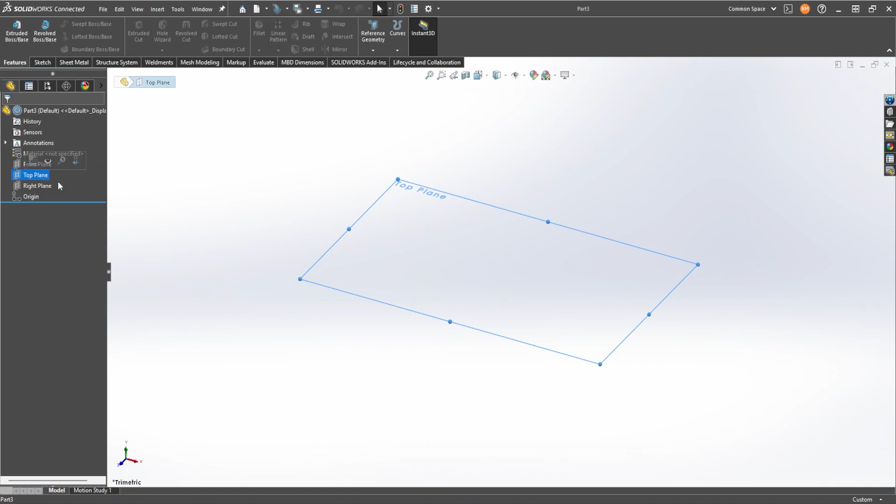We'll start off in Solidworks, new part. Starting on the top plane, we're going to begin with the first cap, using a radius of 70 millimeters.

After that we'll extrude it to 15 millimeters, and that will serve as our end cap.

Now we're going to go to the front plane and draw out the shape of the lamp itself. We'll just start with a simple line sketch and then get it dimensioned.

Right now I'm doing the outline. I'd say we'll do the thickness around 2 millimeters, and then we'll use the revolve feature to create the shape.

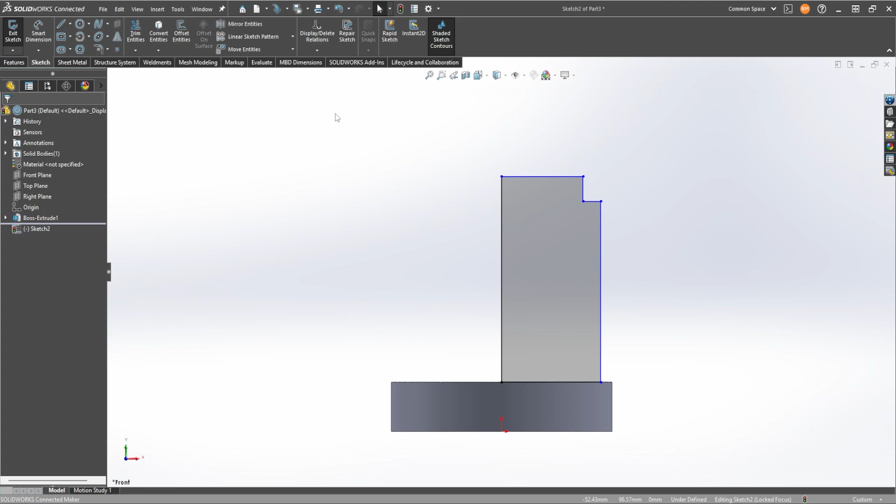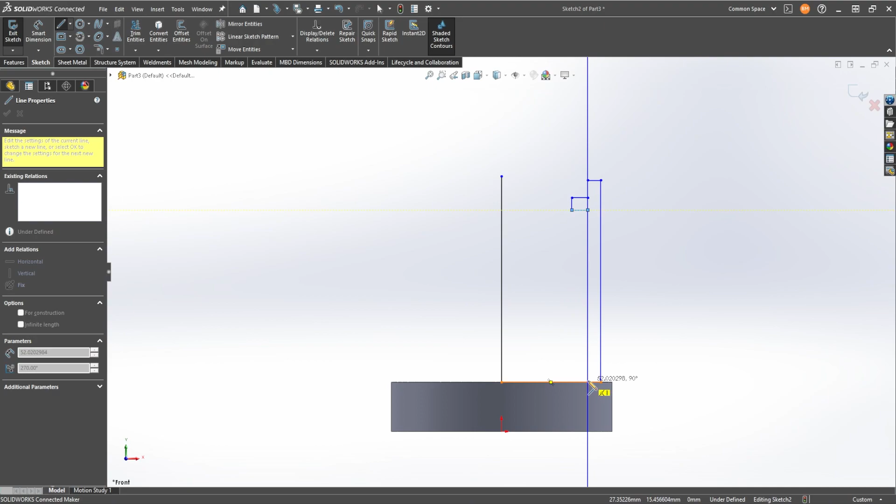So we'll have that thickness and make it 2 millimeters. Just trying to delete that line and create a new construction for the revolve.

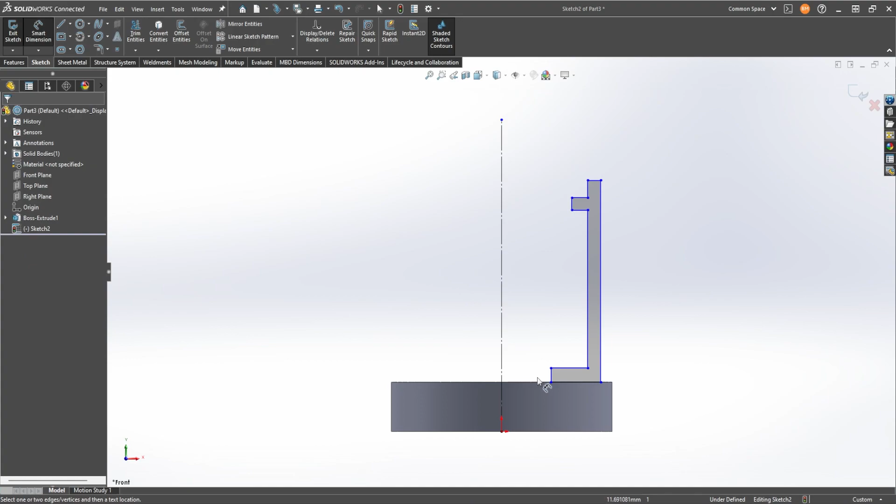2 millimeters is pretty good for see-through clear plastic textures, so we'll stay with that. Get all the edges, fully define the sketch, and we'll do a revolve feature.

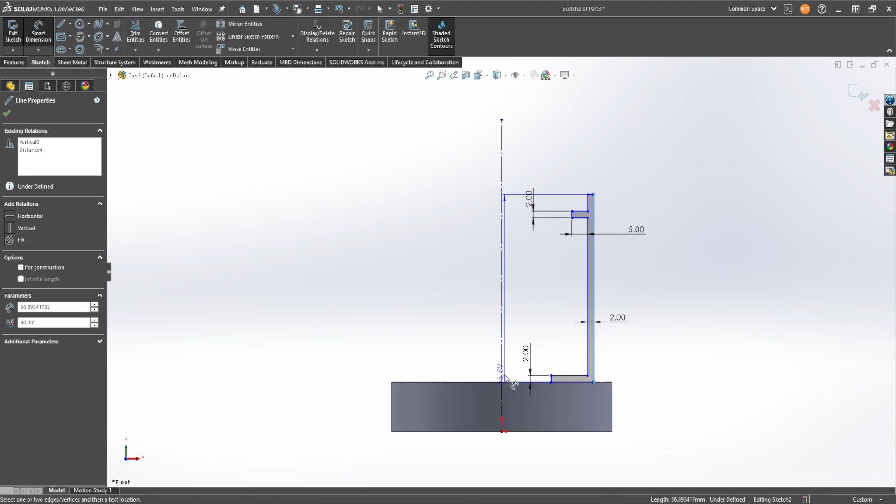30 millimeters away from the center. I'm just adding another lip here to make it look better. I'm going to trim it out, and then dimension it as well so it doesn't change if we change any other parameters of the sketch.

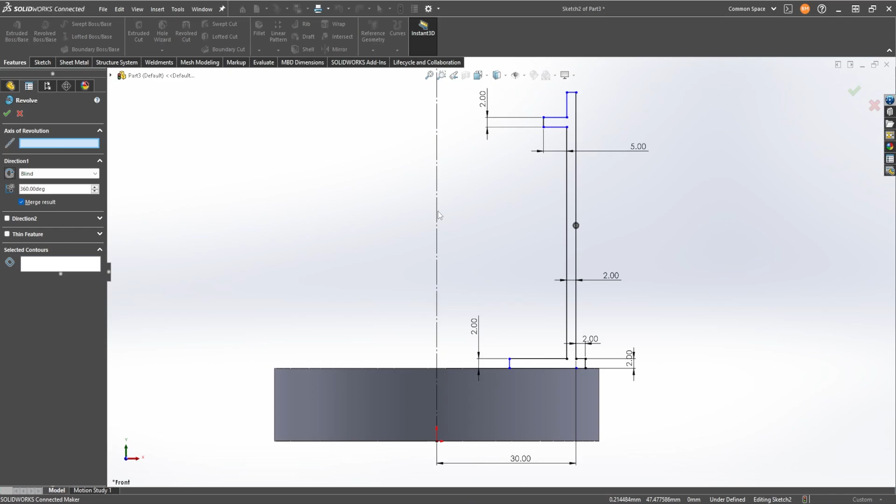Let's give it a revolve. And there we go. Just make sure it doesn't merge with the rest; we want this as a separate material for this part. Yay, got the basic cup.

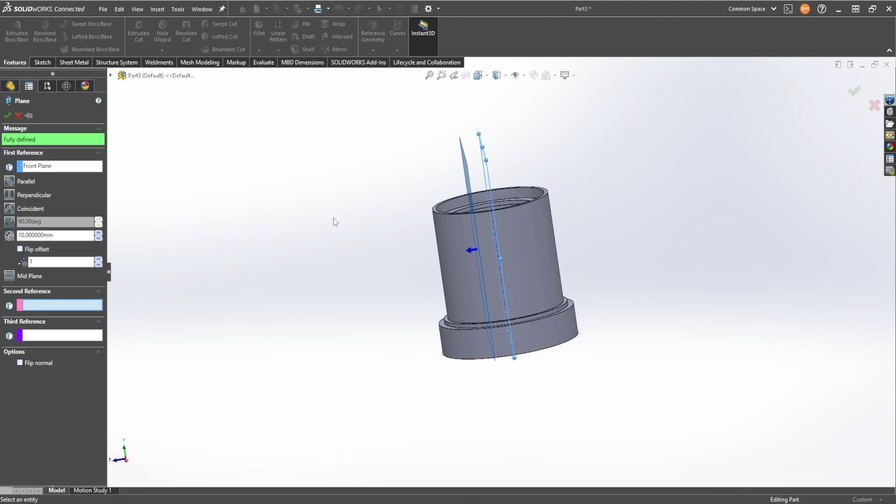Now we'll add the texture onto the cup itself. I'm going to use the wrap feature to wrap around a few ridges.

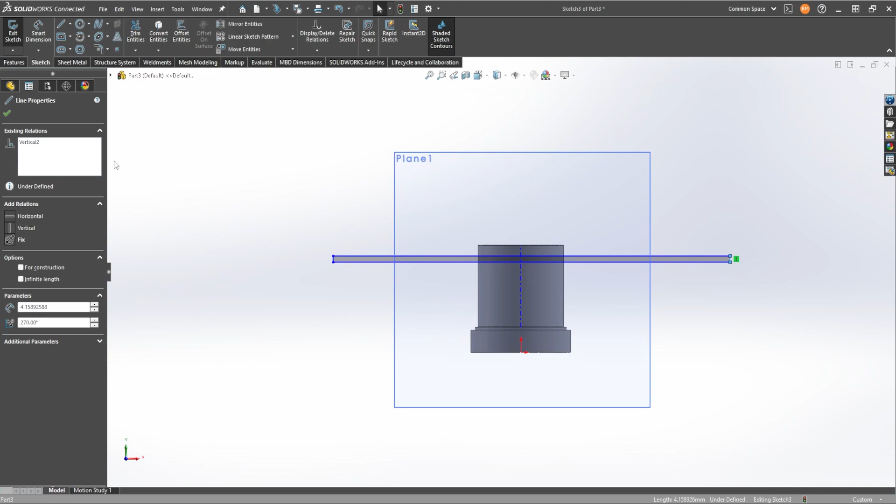I'll just draw a couple simple rectangles. We'll get them to, I believe, 2 or 1 millimeter. We'll do it 2.

And then from the top, we'll get 4, or 2 as well, or maybe 3.

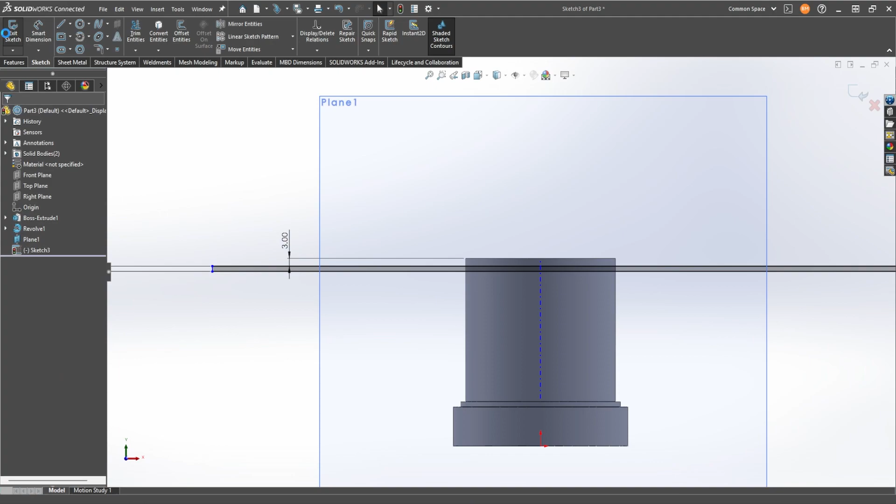I'm just correcting up here. I noticed the cap extends a little bit as well for the next one—it's modular, so you can have multiple lights. So I'm adding a support, making them the same length as the bottom.

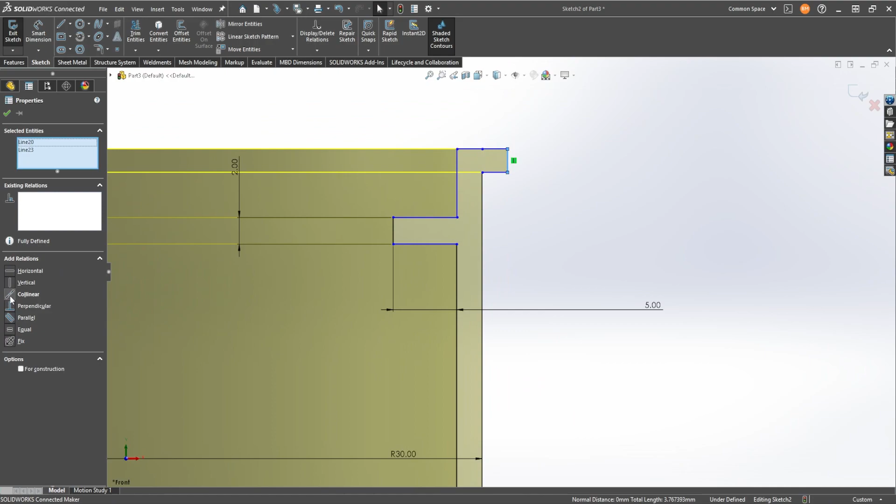Now I'm going to double save this project. This is part of a bigger project which I plan to follow up in later videos; I'll be needing this tower light later.

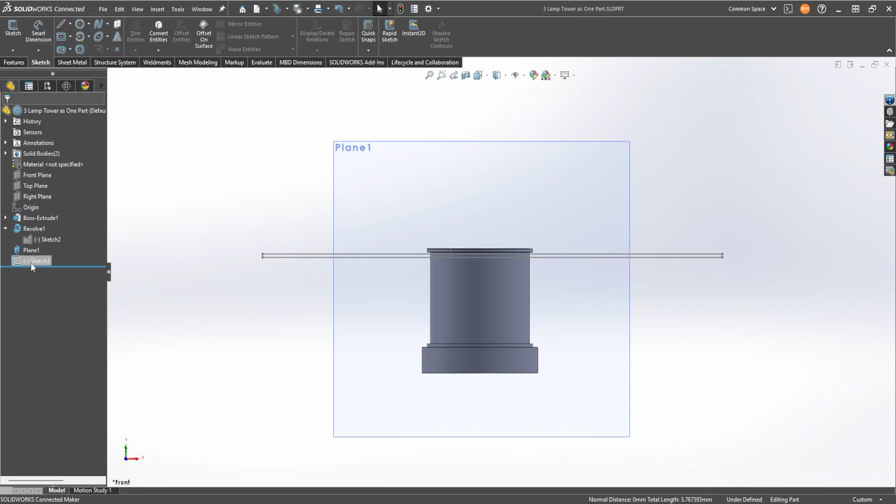So I'll take the array feature and then bring it down.

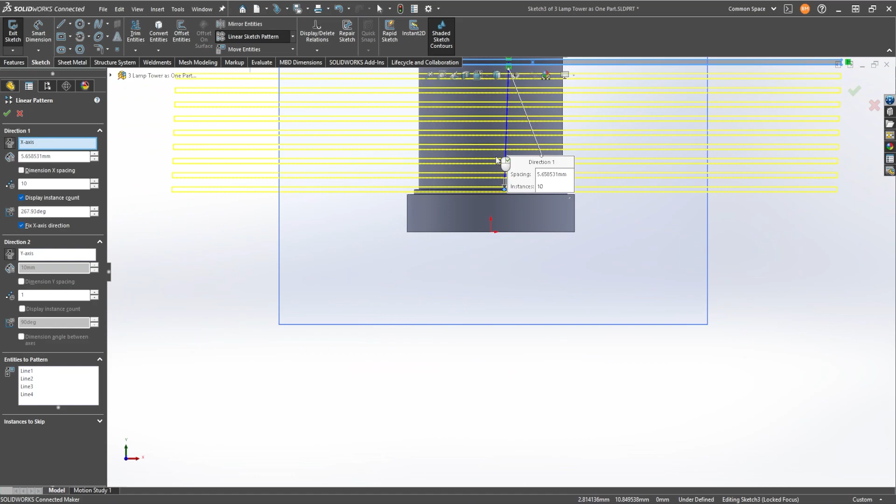Once we complete the sketch, we will wrap it around and then cut into it. Extruded cut, and that should give a pretty nice feature.

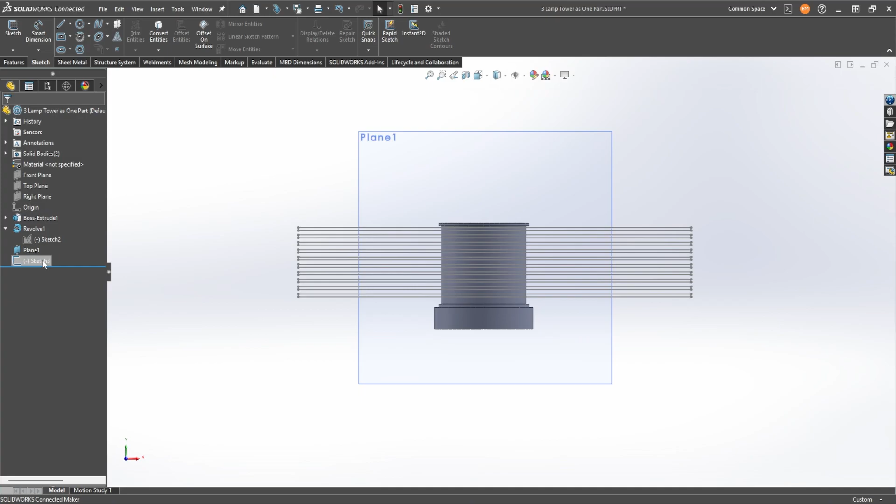It's all about the details at the end. The more details you have in your product, the more realistic it looks, and the better it is for your portfolio. So we exit the sketch, go into features, and wrap it around.

Select the surface we want to wrap. I'm not sure what I'm doing wrong—usually when I wrap, it only does half of the object, but I found an easy way to fix it: I just go back to the same sketch and wrap it around again.

I'm just fixing it up to 1mm; the ridges were a bit too big. So just double checking, we might adjust it slightly.

I might add more ridges. I was double checking with the reference picture, and it definitely has more ridges.

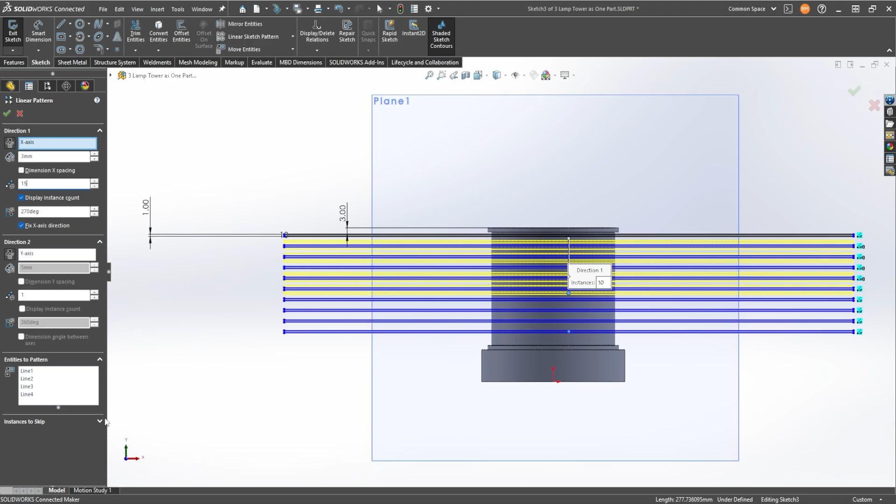As you can see, you can easily adjust the feature, the array, by right-clicking on the properties. And here I'm back wrapping again, and that should get the whole product wrapped.

So for that we'll do the middle—there's a little section where the lamps are stuck to a little plastic square, I think, or metal square, and that's where the cables and wires run.

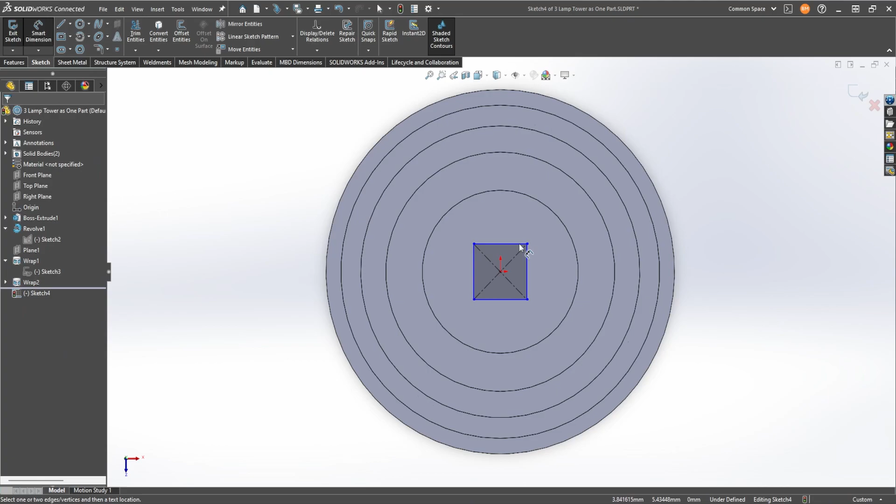So we'll extrude it to 30mm, make sure it's not merged—we want this as a separate part as well.

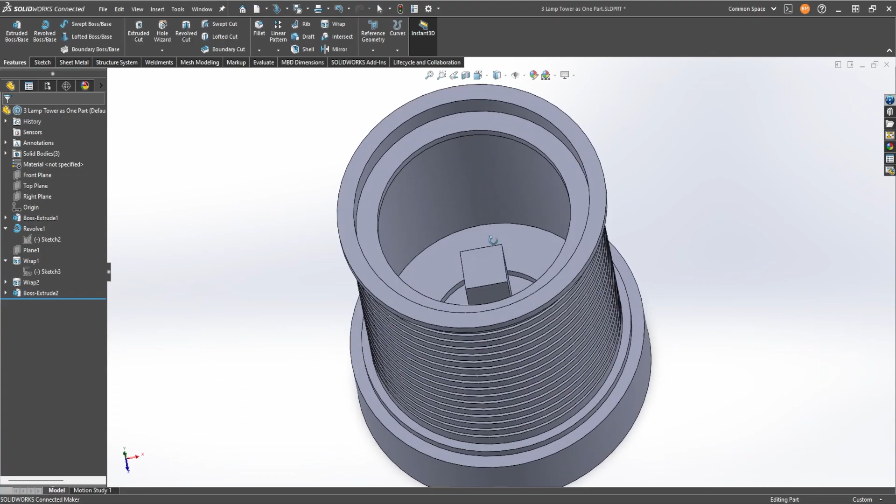Yeah, I'd say that looks pretty good. I'm just going to hide the outer shape, and now I'm going to draw a singular light bulb, drawing a center line so I know I'm on the center.

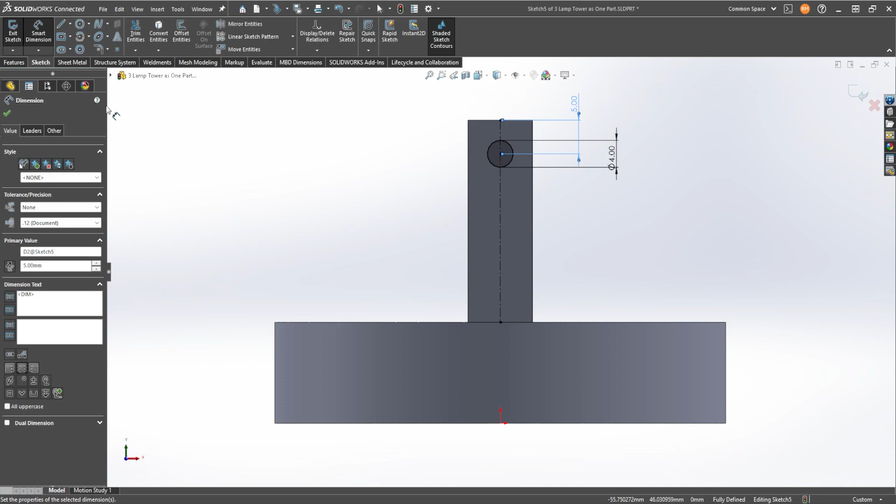We'll start off with a circle, around 4mm will be good, and then from the top let's do 5. Features, extrude—we'll do a couple millimeters, and then we'll dome it so it looks more like a light bulb.

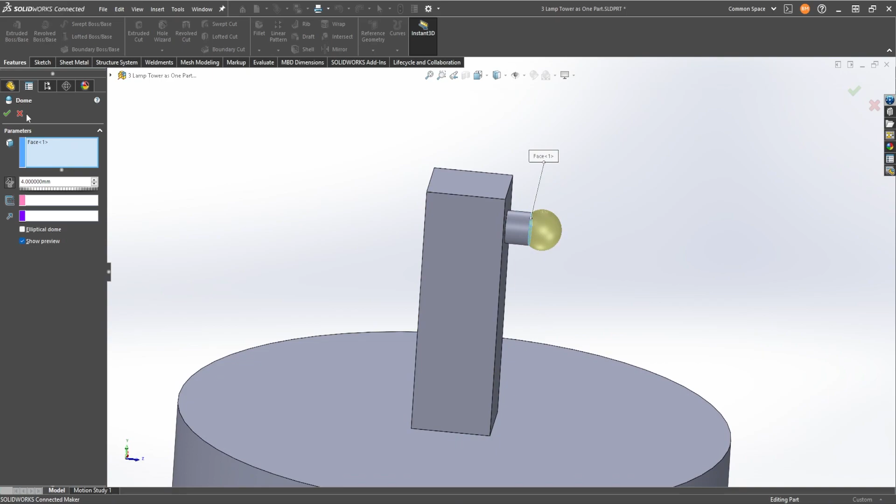I wasn't bothered looking for the dome feature, so I just pressed S on my keyboard, which opens up a little search bar beside your mouse. That's pretty useful.

We're going to use the circular pattern to get the light bulb on the other corners, and that should easily work nicely.

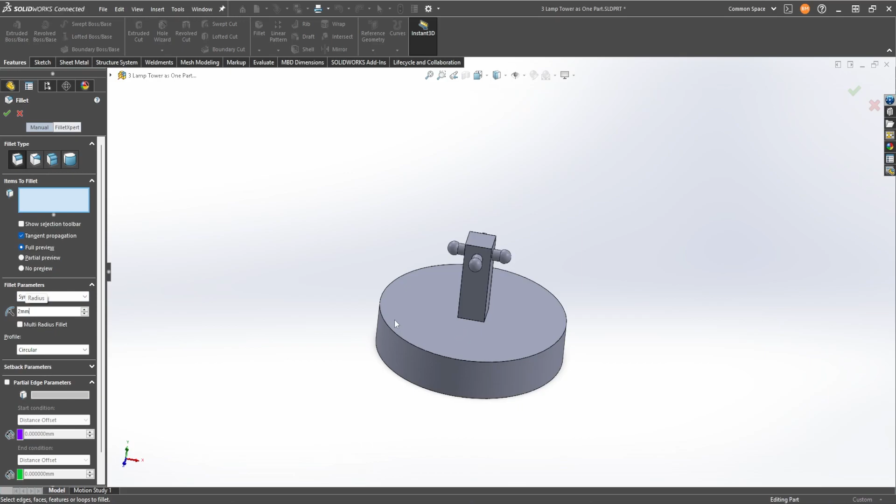Let's fillet it up a bit so it looks cleaner. I think I should have left out the bottom fillet, but we'll leave it for now—add some more fillets around.

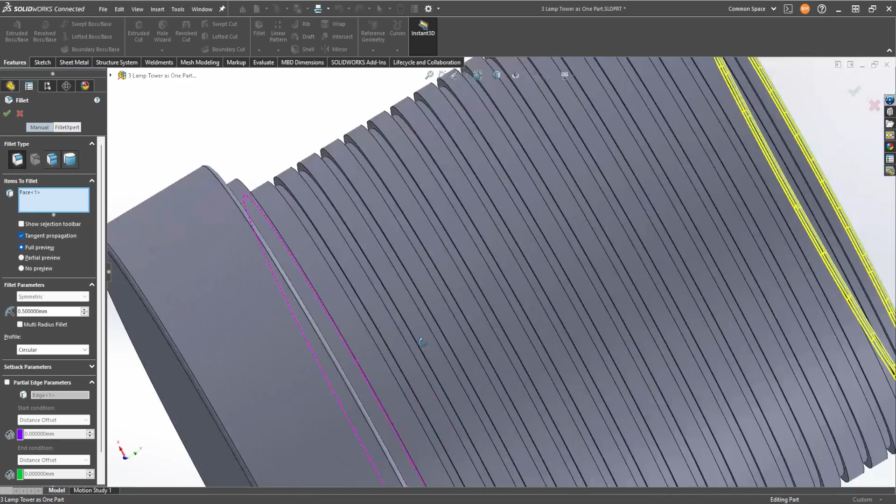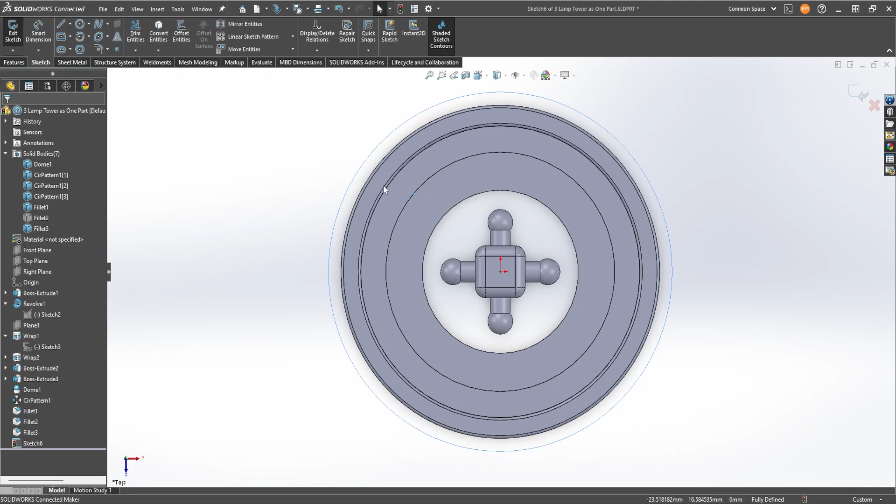You could go around and add fillets to every single edge, but I'd say it's more realistic if you leave out some edges, especially if there's contact. So if there's one surface contacting another surface, don't have a fillet on that - make sure it's nice and flat. But when you have a corner that's sticking out, that could be filleted. That's how usually everyday items work. You don't stick two items with glue where one has a fillet on it - you don't get as much surface area.

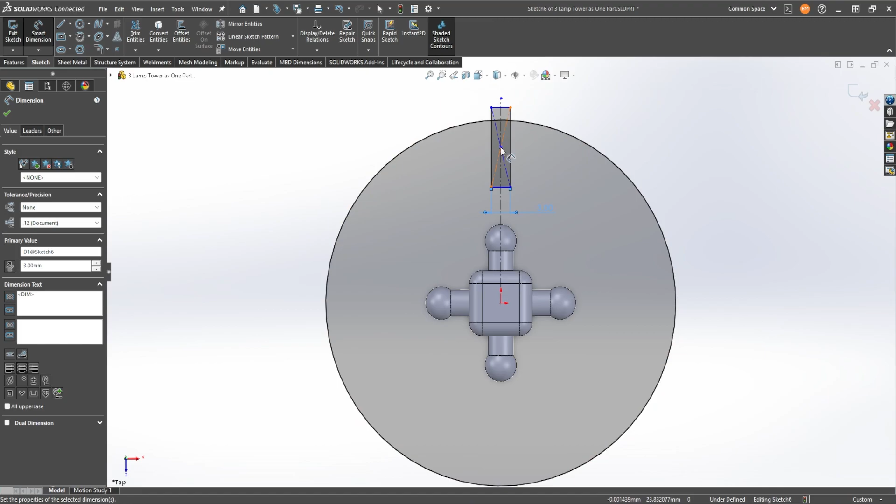So now I'll be just drawing a little support. I saw the reference picture has a nice support sticking out. The more details you add, the better your product will look at the end. So I'm just adding a small support here, negotiating what's the best length. And I'm just going to trim out the edges.

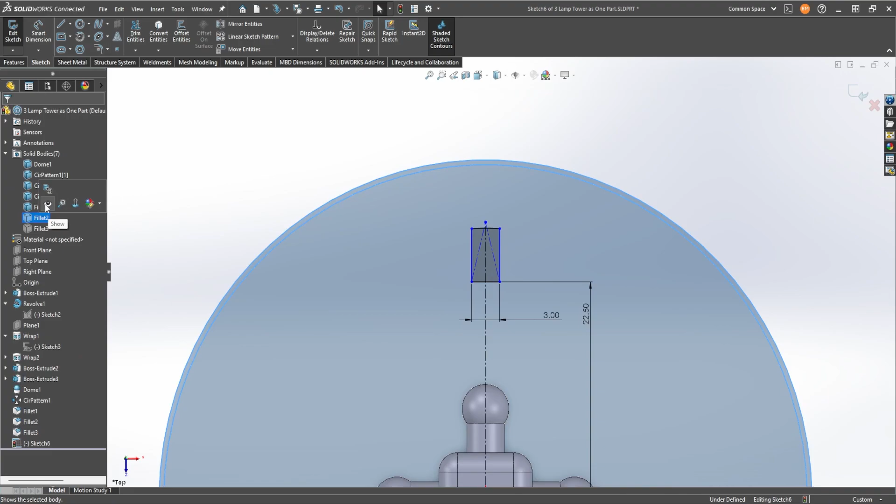Make everything else visible. I later discovered that you can make items or bodies appear and disappear by pressing tab and shift tab and roughly pointing with your mouse to the area where they should be. So it's gone off the center.

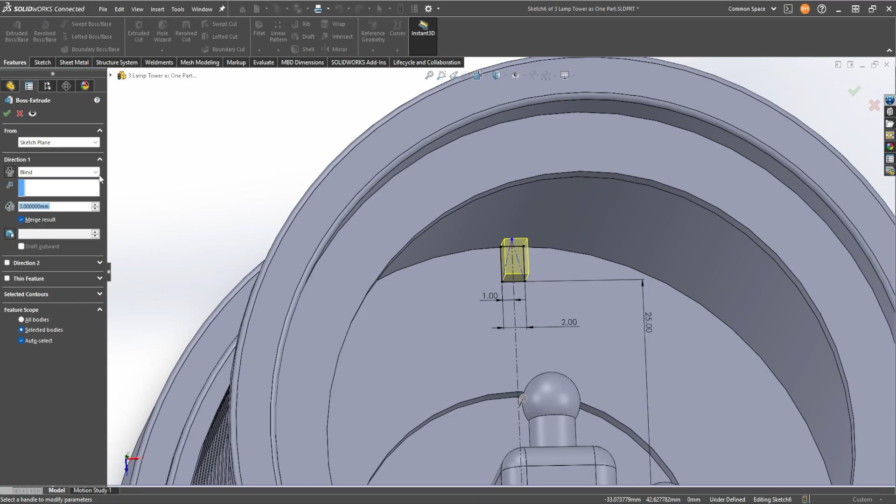I'm just going to do 2mm divided by 2, because 2 is the thickness and 2 is to get half. I'll get that extruded to the top surface. I'll just stick it here - it's going to be merged anyways.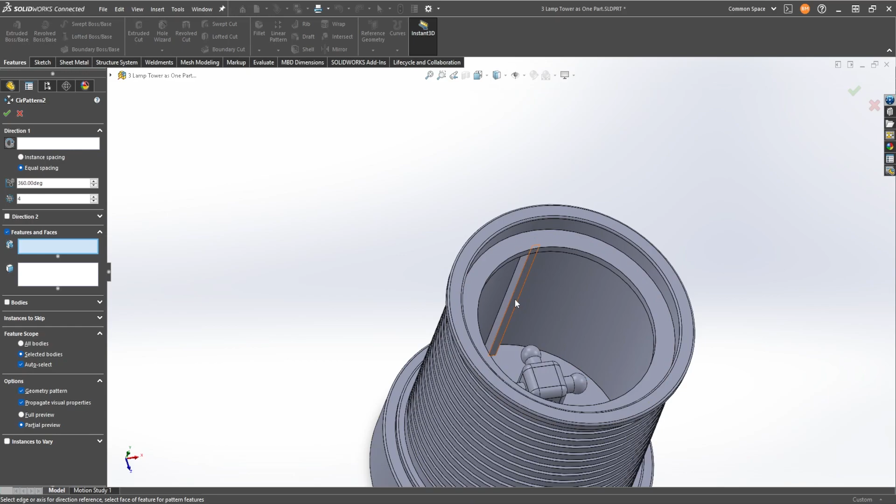So time for the circular pattern, and I'd say we'll do 4 of these. Yes, that looks about right. No, we'll have to do the edge itself - we couldn't do the surface. Yes, I'm pretty happy with the result.

So there we go, we have the cup and the inner mechanism done. So time for the top - we'll do an end cap. But first I'll do the bottom cap, or the bottom leg.

So I'm just checking the height - we have roughly around 5mm. So on the bottom cap, I'll do around 5mm as well.

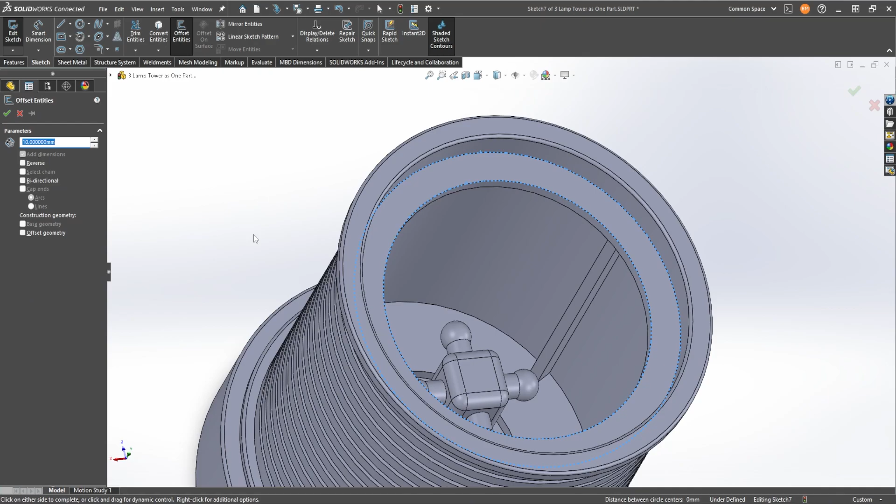I'm trying to offset, using the mouse gestures. So if you want to do mouse gestures, you just press and hold right click, and then flick your mouse up, down, left, right, and it'll give you different features. You can adjust that in Solidworks settings underneath mouse gestures somewhere. If you do a Google search, you'll be able to find it.

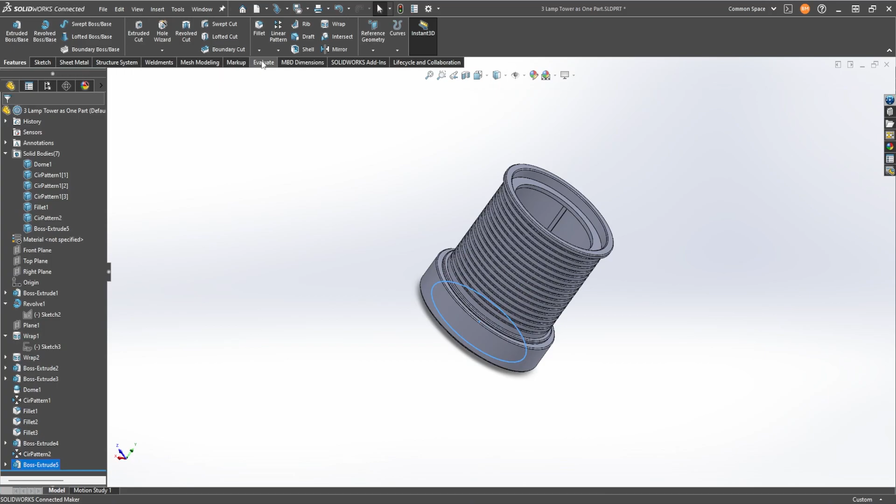So I'm just here double checking, around 5mm. Looks about right.

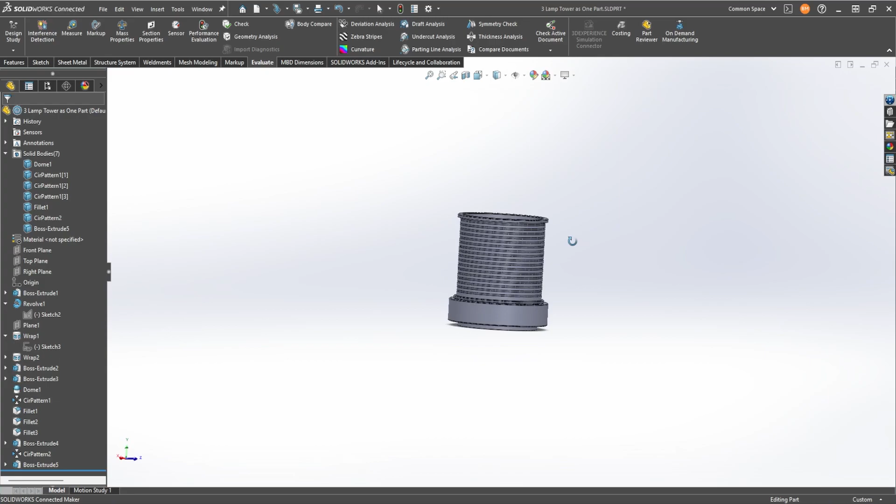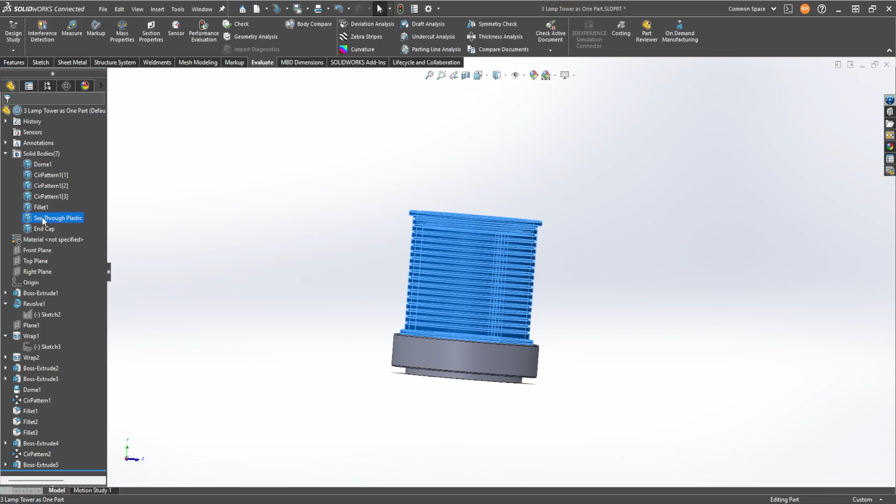I'm just going to rename the bodies now, so later when we're texturing it and saving as an assembly, it's going to be easier. Also, make sure when you're doing assemblies or drawing everything as one part but multiple bodies, please just don't be repeating yourself. Like here I could go out and draw another cup, draw another cup, draw another cup - I need like 3 or 4 of these cups for lights. But I'm not going to redraw them. I will later just copy and paste them again in the assembly.

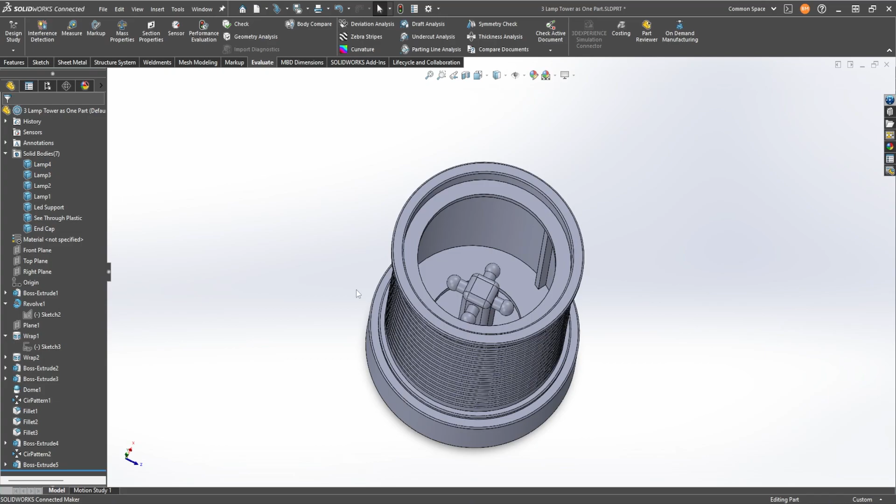So now time for the leg. We'll do it on the right plane. Start off with a center line - it's going to be a revolve feature as well.

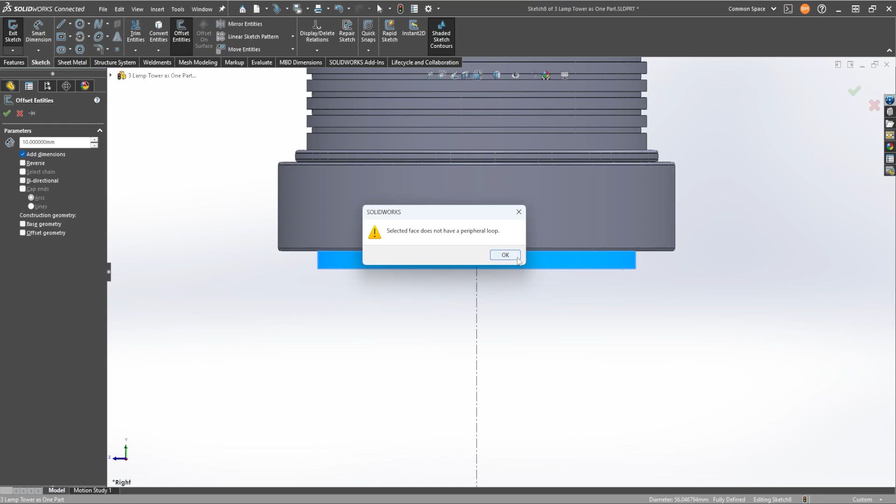I was trying to convert entities of the circular edge, but for some reason I have disabled the line highlight. That's something I'm going to have to figure out later. But for now I'll just draw around.

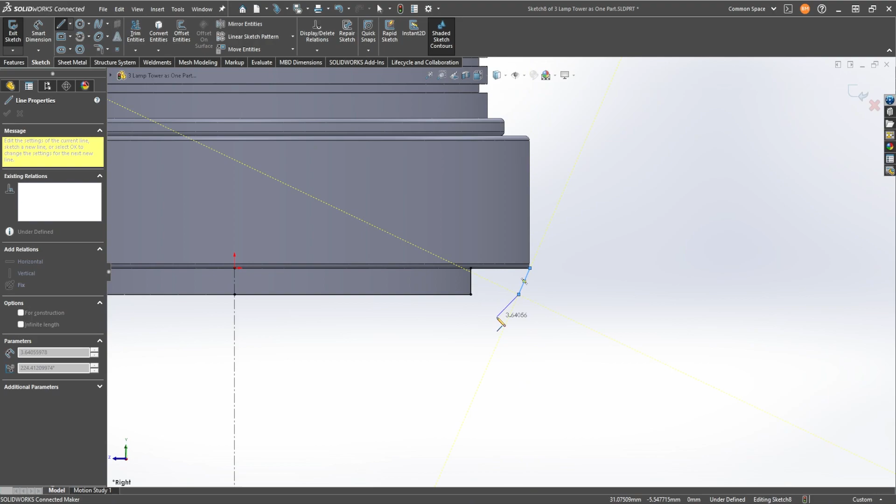And then I notice it sort of comes in and then goes down at an angle across, leaving space for electronics, and then down here for the leg. I'm going to later fix it with dimensions.

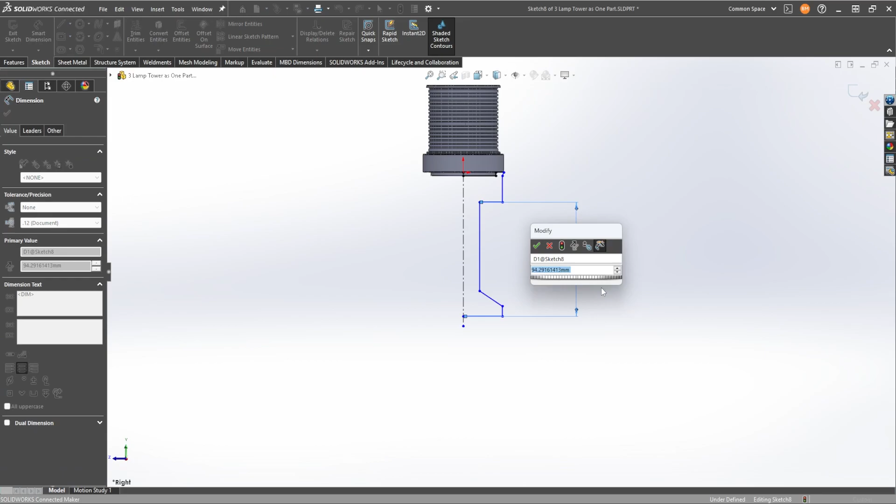So doing the base now. Set the height to 60mm. Obviously everything got shifted - we'll bring it back up again.

Like that, there was a mouse gesture as well - it's much quicker, much faster. Overall this drawing took me 45 minutes. It was quite short, nice project.

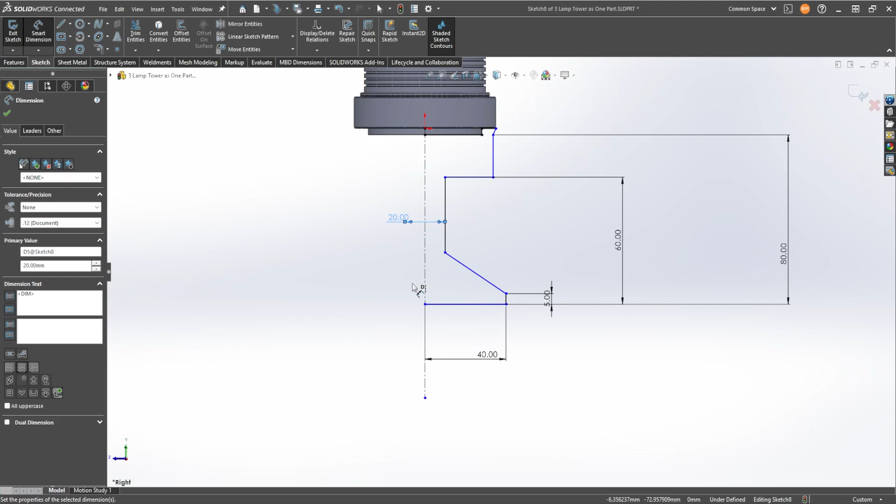5mm for the base, and then we'll do the angle as well. So first I want to get the radius for the upper part of the leg, or the middle part I should say. We'll fix up this edge here as well.

It's just the little details like the little chamfers and the fillets that really make your drawings pop out.

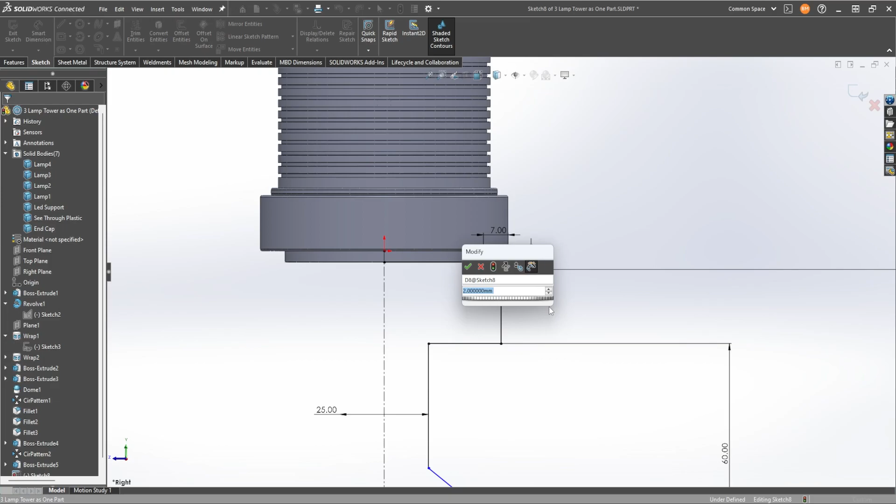We'll get that across, and then we'll get the middle, the upper part as well. I deleted the other one so I could have the dimension there. Time up for some 5mm fillets.

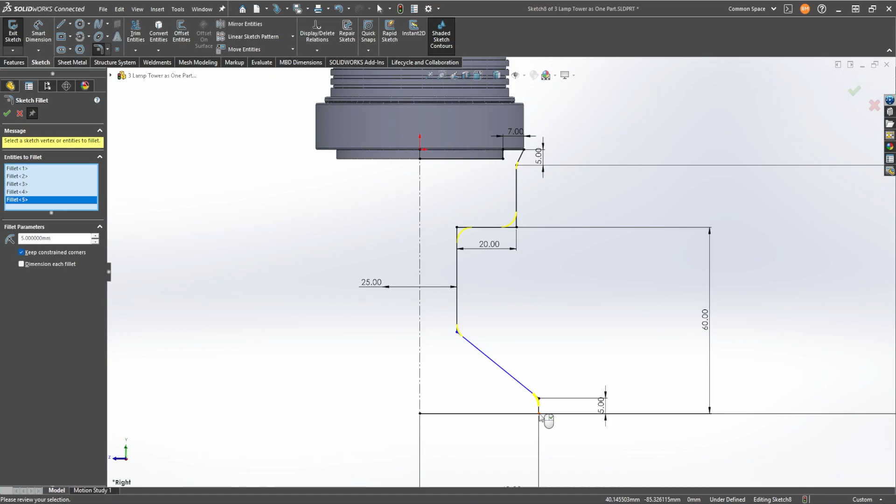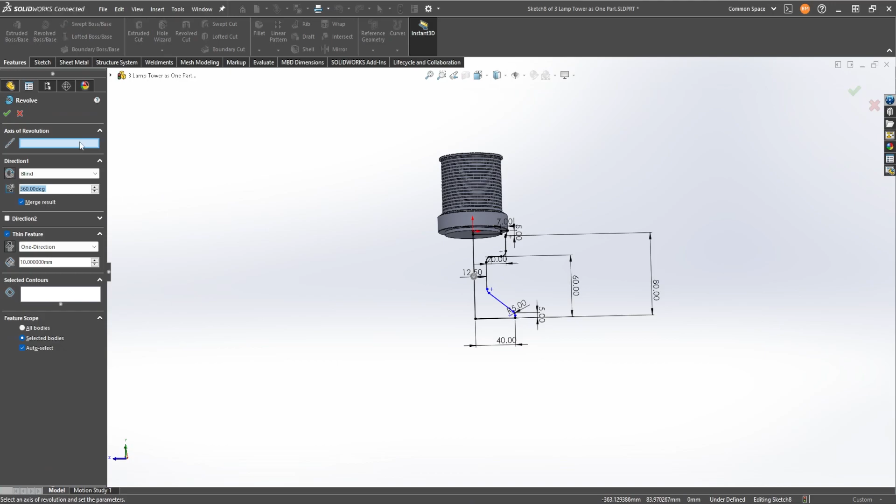And then we'll revolve the sketch. I had thin feature selected, but I didn't notice it, so I was trying to do the sketch again and again. Sometimes you just get funny situations like this in different programs. Eventually we'll figure out what's going on.

I decided to just leave in the struggle, so you see that nothing's perfect. You always see these videos on the internet where everything works so perfectly fine, Solidworks never crashes, never has issues.

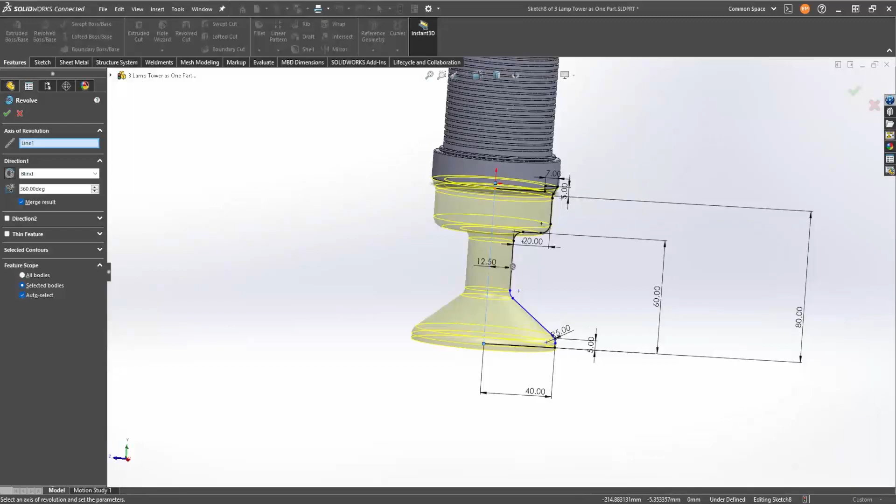Then I realized it has a thin feature, so I removed it, and it worked perfectly. Probably the previous rotation feature I used had a thin feature, so that got saved from before. Here I'm just going to fix up the legs a little bit, make it look a bit better.

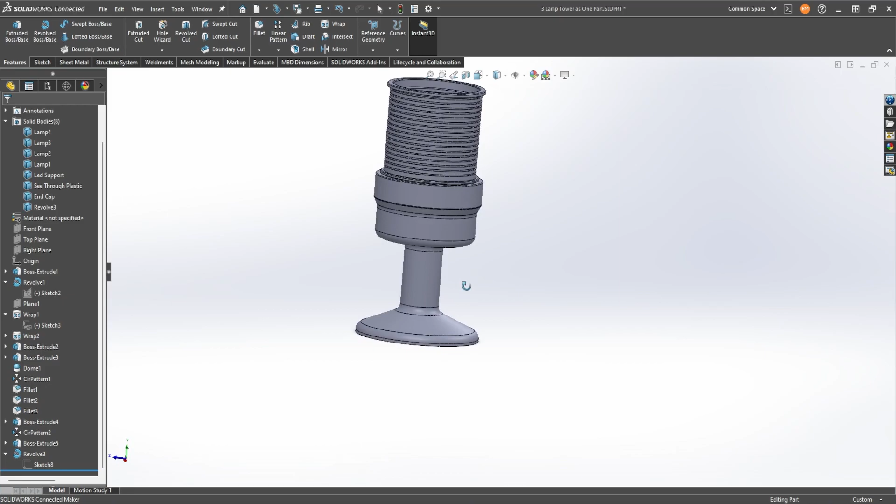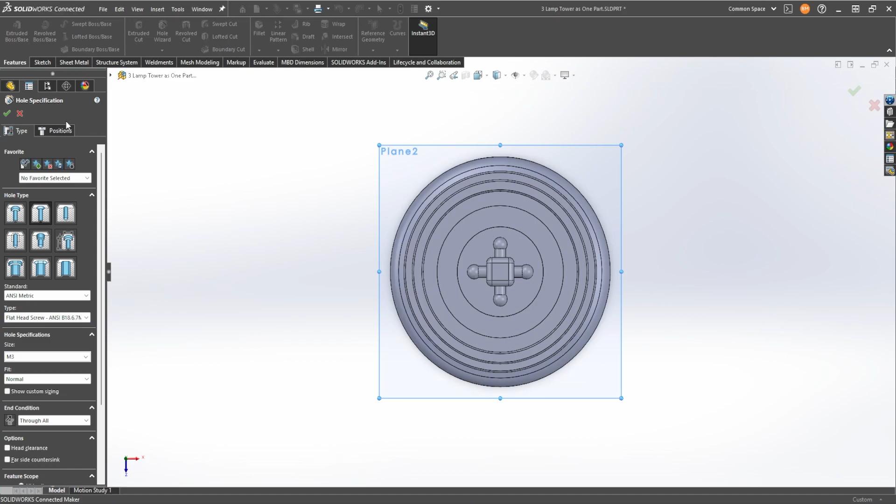Now we're going to prepare the plane for the hole. I'm just choosing the correct size. I think the image said M3 as well, so I put an M3. Then we move it out here.

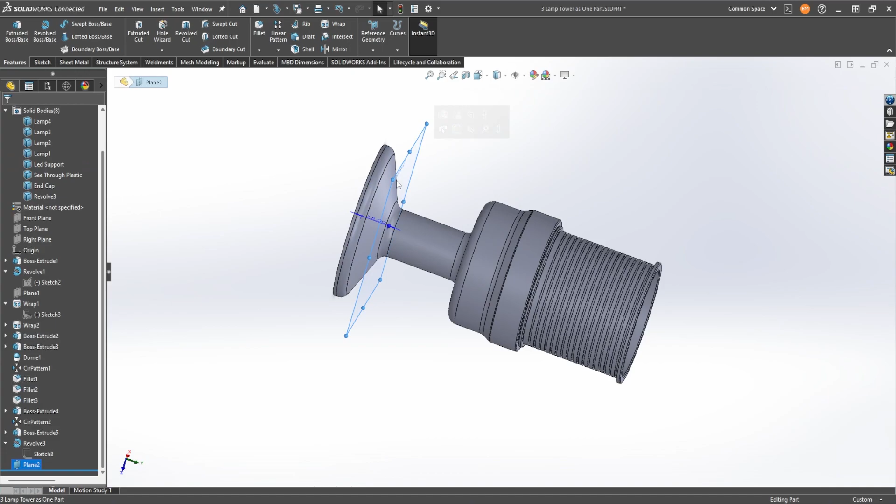Unfortunately, for some reason, even though the normal of the plane itself was correct, the hole feature still wanted to draw holes in the wrong direction. So I'll be battling this for a couple of minutes. Now I'm just hiding away all the parts that could have been interfering.

That was with Tab here. So the previous one I right-clicked to hide, and the other ones I tabbed. So I'm going to try the feature again.

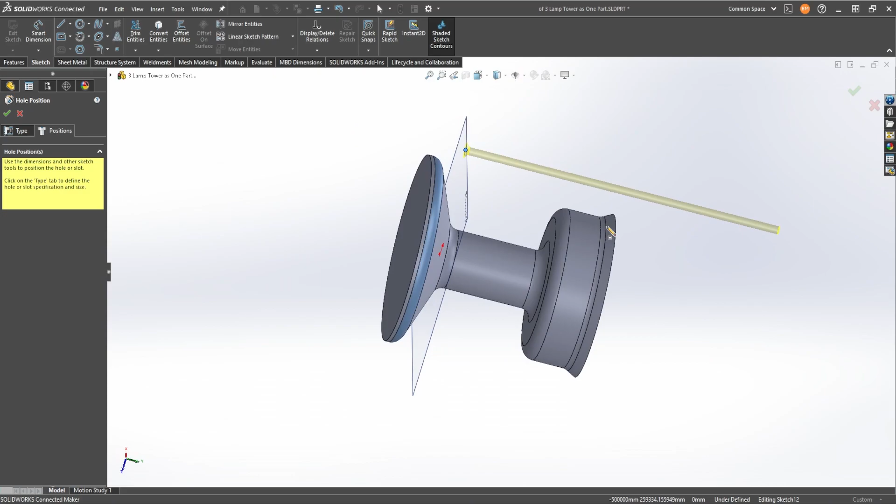Now we'll have a look at it. It's still going the wrong way. I'll probably do another plane and try to aim it towards the plane. I'm not sure why it's going the wrong direction. It's probably something that if I looked around more, I'd figure out eventually.

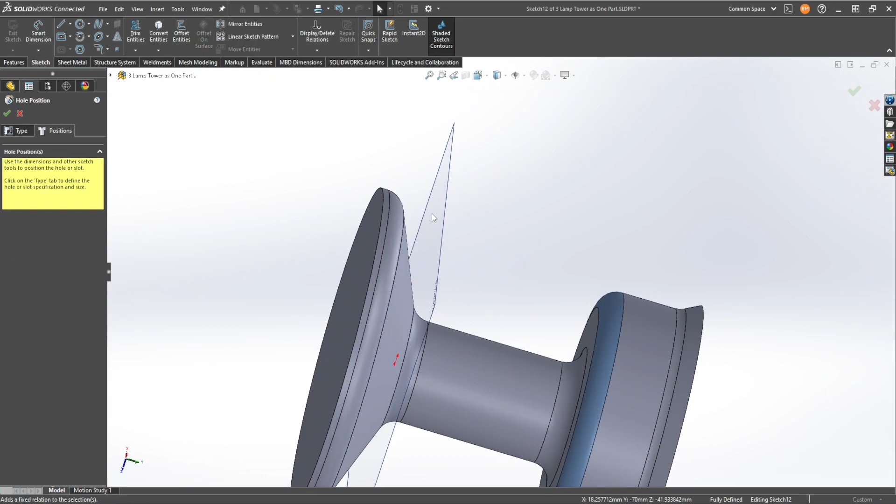So I decided to go for the surface. But that means I won't have the nice countersink, so that's something, like I said before, I'll do with another surface.

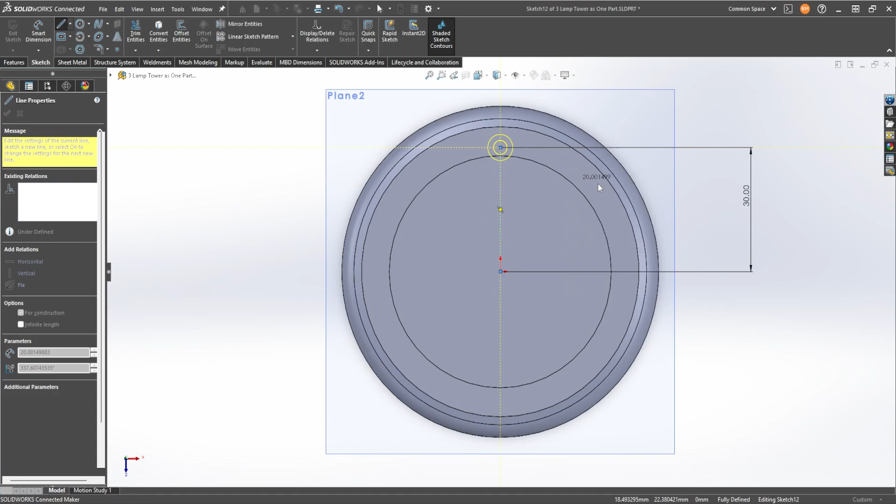Just want to double check that it's on the center line. There we go, we have an M3 hole for the screw. There's just some thunderstorm in the background.

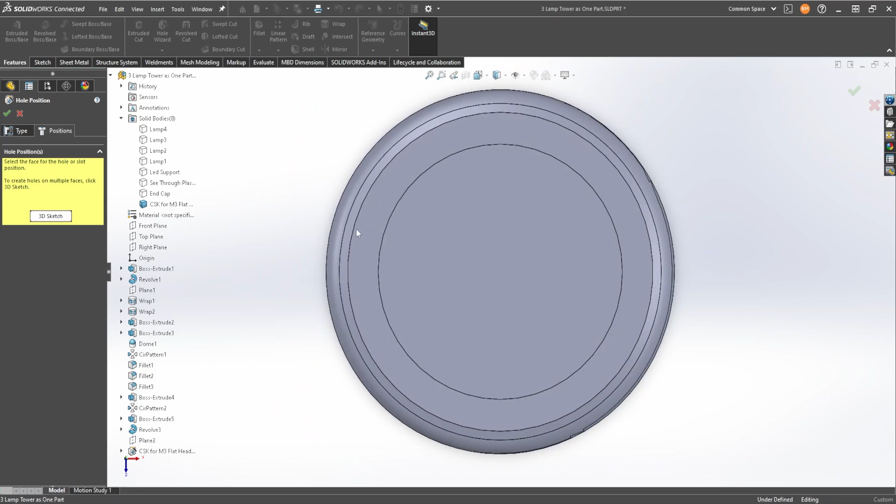Now I'm going to try and make a slot so the screw sits nicely in the hole. So that's me trying to line the hole, doing it from the far side. As you can see, I'll be having a similar issue again.

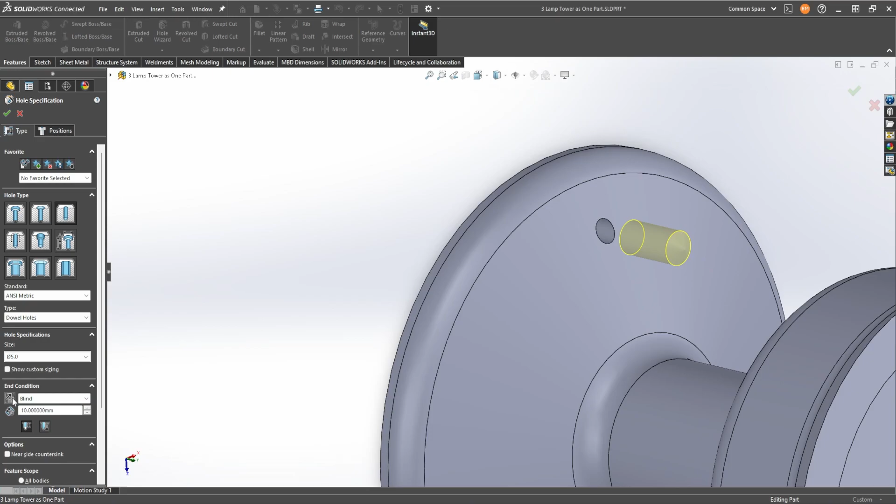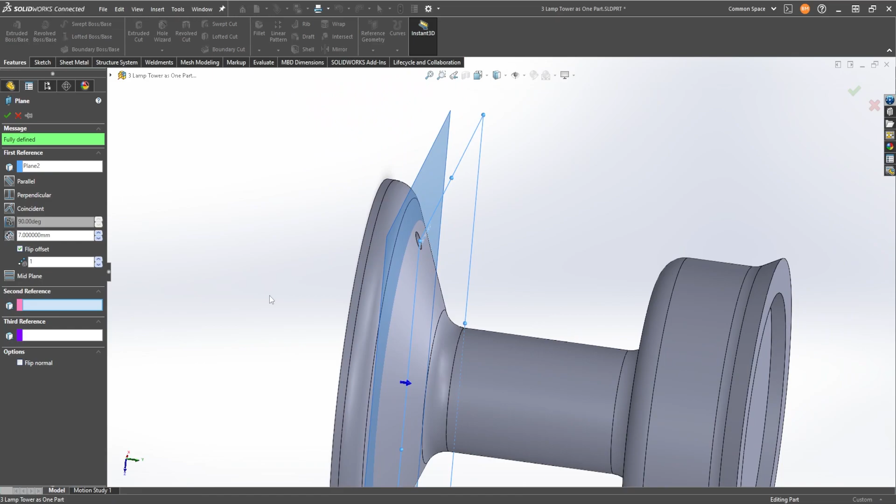So I'll just create another plane and then probably feature it into the surface plane. Take the current plane and give it a couple of millimeters. A little bit more, yeah, that seems about okay.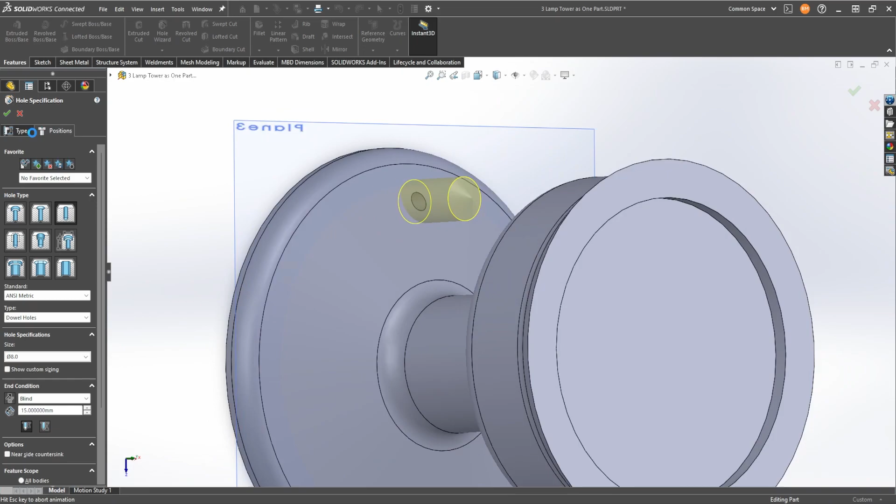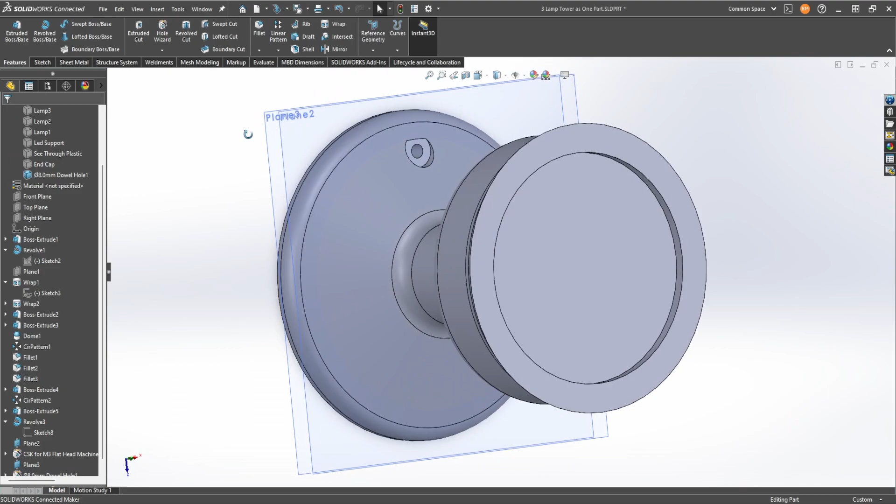Select the center and then down to the surface. I think I started to sketch on the wrong plane in the first place. I'll select the first plane and get it correct again. Just these little things you have to get right with Solidworks, or maybe actually any software.

Pretty nice groove, so I'm just going to lower it down a small bit, and then we'll use the circular pattern feature to get it correct, and there we go. We have 4 holes to secure our lamp.

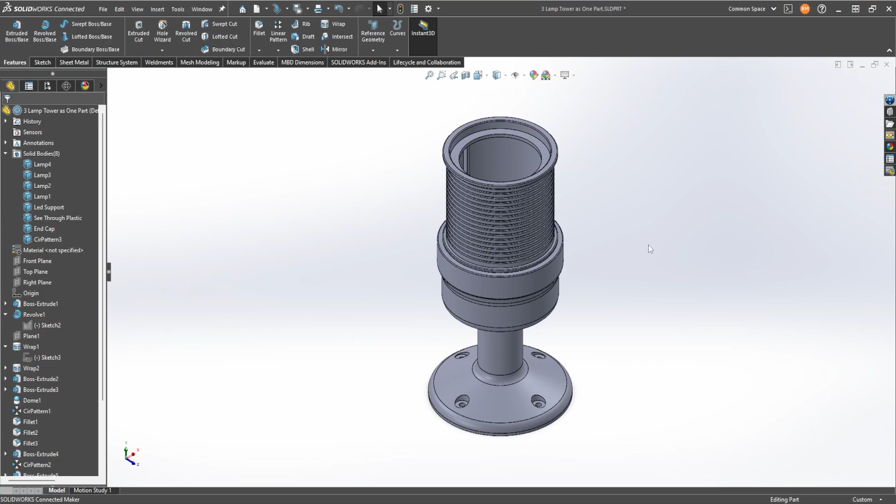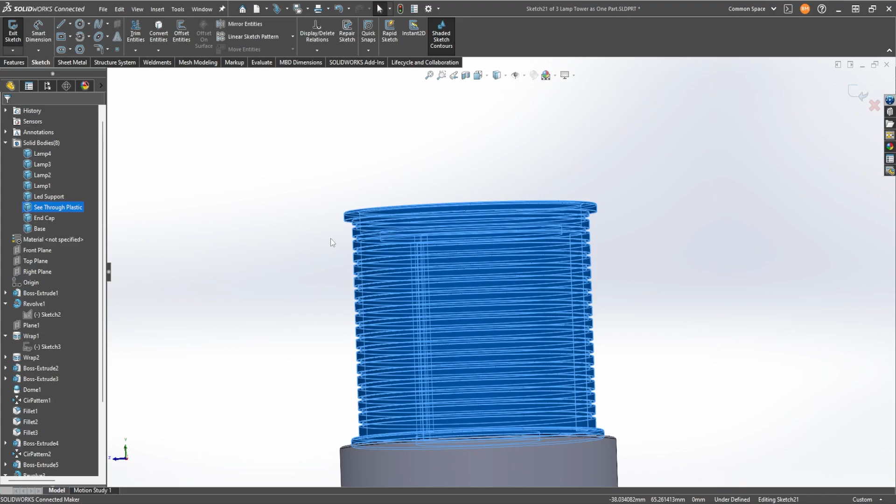We can show all the parts with Shift Tab, and we'll resume this in assembly. There it is, projected transparent, you can see it looks pretty good. So I'm going to add a top cap, and then I'll move it into assembly. I'll just split up this video and enjoy the rest.

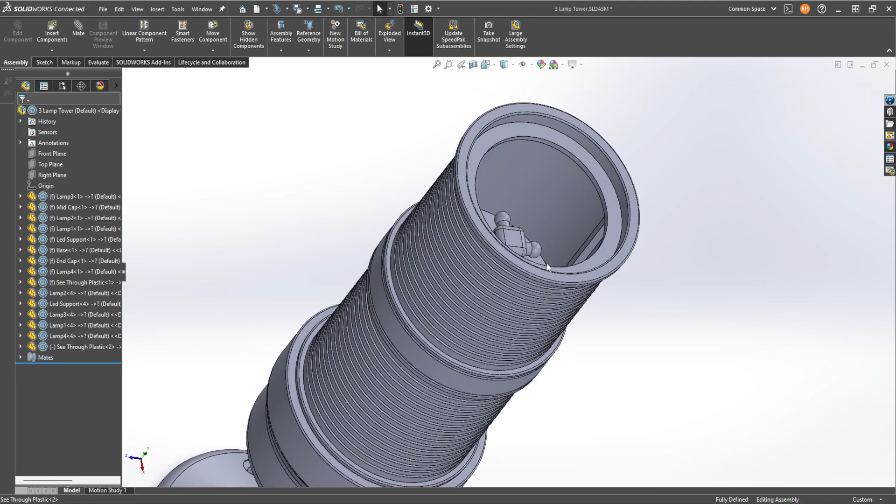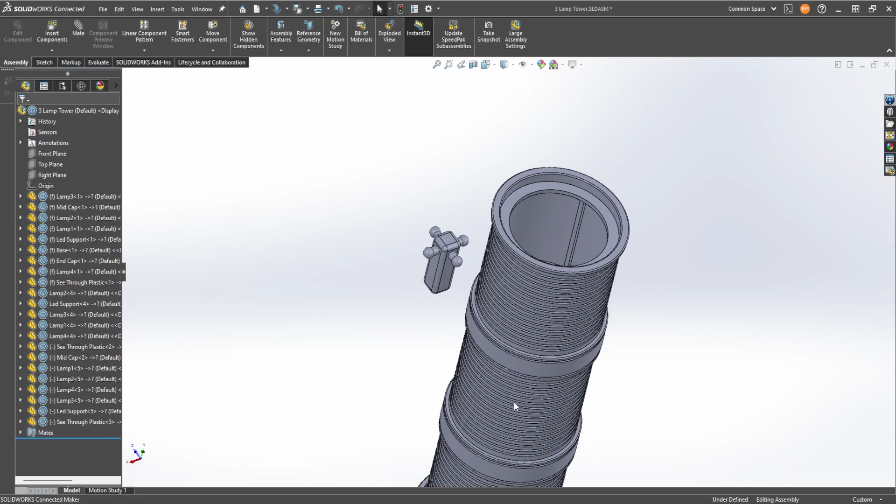So we're nearly there, slowly finishing up the assembly. Got all the lights finished. Just trying to get the light modules to assemble and align correctly. Now the end cap, and there we go. The lamp is finished, just a little bit of texturing left.

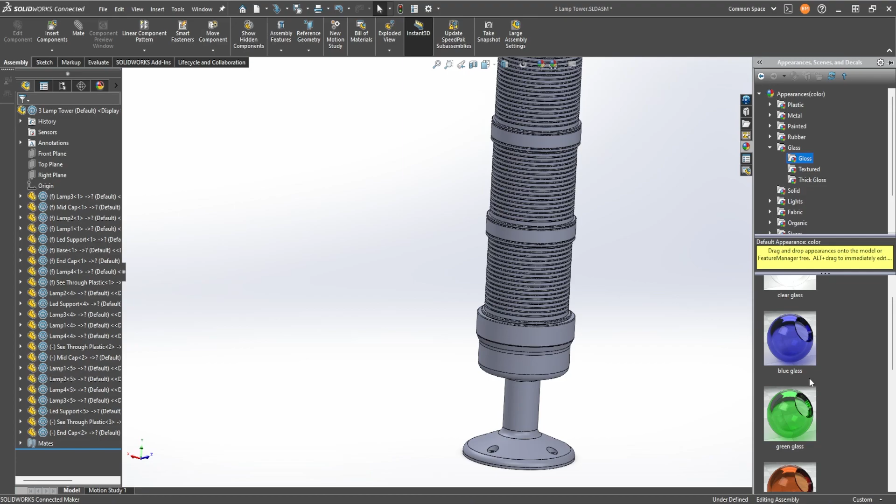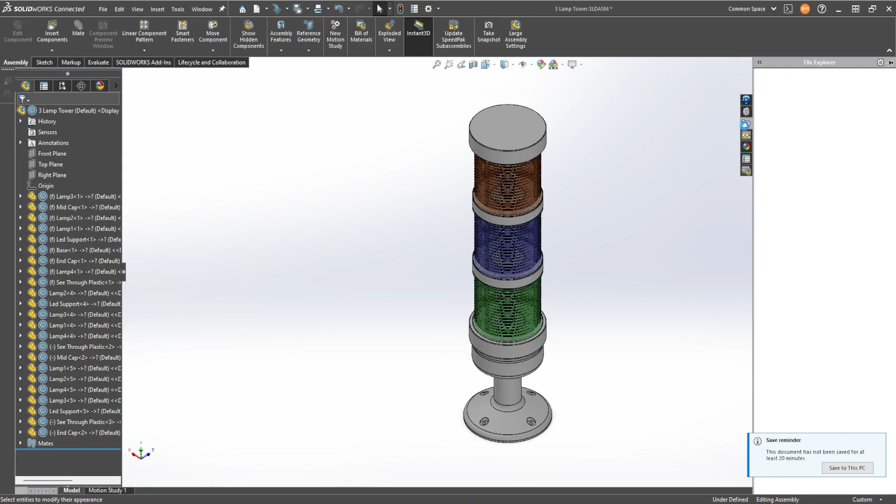Trying to find the correct glass. Unfortunately there's no red or orange or any other, so I'll have to just choose blue and brown. It's pretty good, most important that the red light is on top, the most important light, so the machine indicates straight away it needs your help.

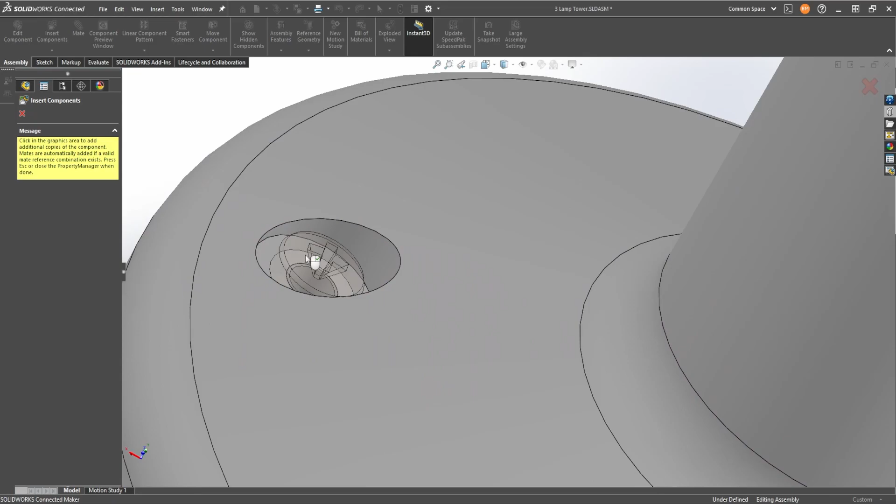So I'll add the screw again, this time giving it a nice schematic so it looks good later. And there we go.